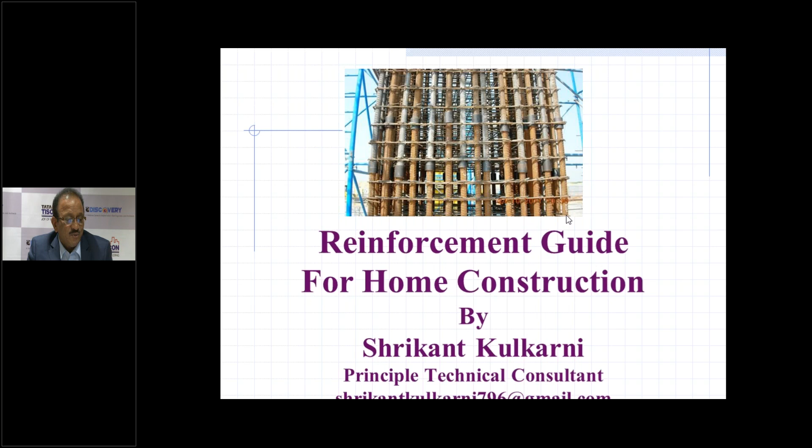So we take up the presentation today. The topic is reinforcement guide for home construction. The presentation outline would be something like this. First we will discuss about the steel industry, then what is this reinforcement, why reinforcement is required, little history about the steel industry, then what are the requirements of steel reinforcement, what are the Indian standard specifications which are required for steel to be used in the construction industry, what IS 456-2000 has to say about the steel.

Then we want to also cover few steel constituents which improve the quality of the steel, or there could be some disadvantages also because of some particular chemicals. We will see that. We will discuss about importance of cover to be provided to the reinforcement, why it is required. We will also cover the impact of corrosion on the construction, and through few interesting slides, we will see what are the practical examples of do's and don'ts when it comes to the reinforcement. And finally, we will conclude, and then after that we will be taking the question answer sessions.

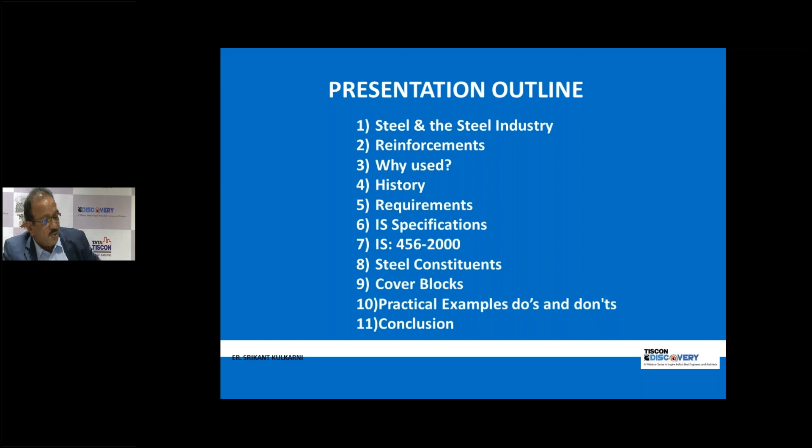So we first understand what is reinforcing steel. Reinforcing steel is an alloy of iron and carbon basically, and it is the most important ferrous metal in building construction. This iron is relatively abundant in the earth crust. It is only next to the aluminium.

And iron undergoes a change of crystal structure at red heat, which assists in many production processes and leads to metallurgical advantages. For example, in cement industry, we manufacture clinker. So iron ore is one of the raw materials which is used, which provides a very good flux, and because of that the clinkerization process highly improves. It assists. It's like a catalyst in the cement manufacturing process.

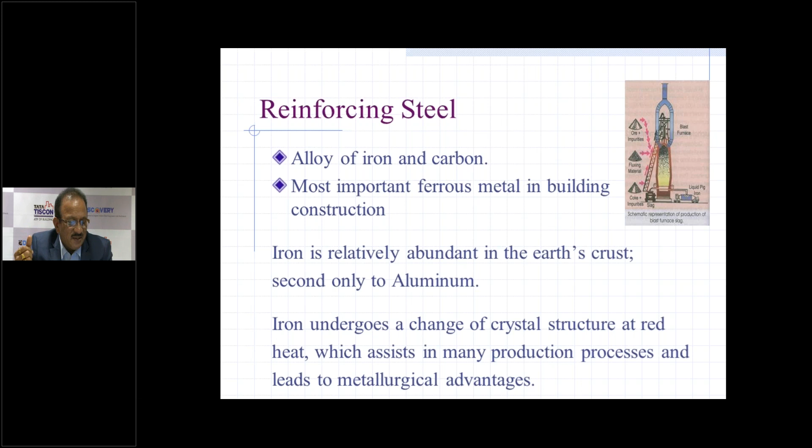We will see how steel industry has grown in India first. In 1947, when India got independence, the manufacturing capacity on pan-India basis was only 1 million ton per annum. And if you talk about recent development, during 2014 to 16, India was third largest producer of sponge iron, and total steel produced in India was around 101 million tons, and we had more than 50 plants in India then.

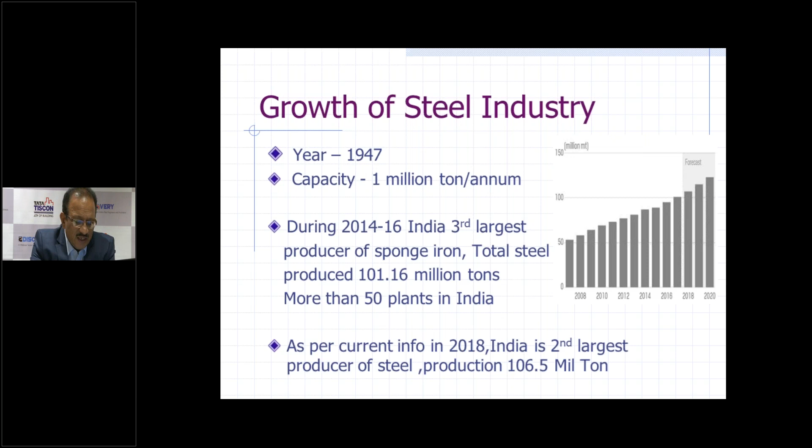And as per the latest current information, in 2018, India is second largest producer of steel, and production figure is 106.5 million ton. This is, I think, interesting statistics we should have at the back of the mind.

Who are the major steel manufacturers in India? Of course, Tata Steel is there, Tiscon is there. They are one of the leading manufacturers. Apart from that, Steel Authority of India Limited is there. Then Bhushan Steel, JSW Steel, Vizag Steel, Essar Steel, Ispat Industries, and so many other small and medium-sized players are there in India. I would not like to cover all of them, but these are a few major players who are playing an important role in the manufacture of steel.

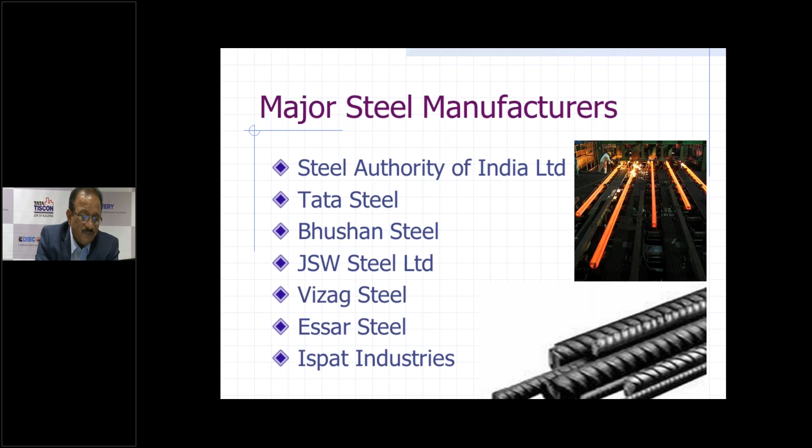What are the requirements for reinforcement steel? Number one, steel should have high yield strength or proof strength. Number two, steel must be ductile enough to permit bending as well as to guard against brittle failure. We cannot accept brittle failure in steel.

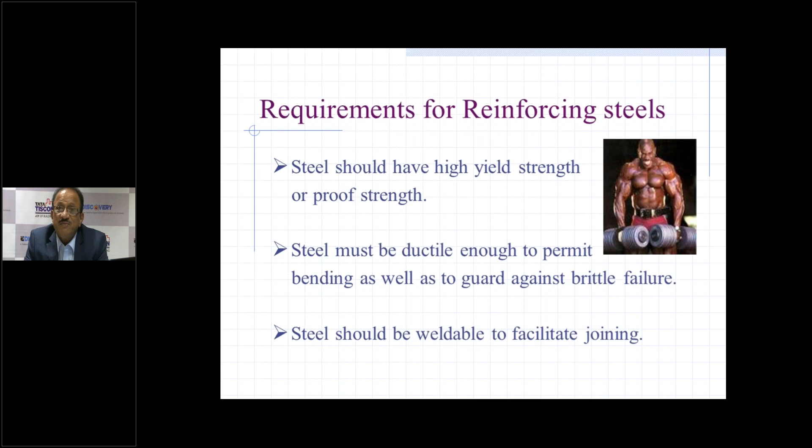It should be ductile, and steel should be weldable to facilitate joining. Many times this reinforcement is to be welded also. Many consultants recommend it in particular situations. Normally we tie the steel with the binding wire, but in many situations welding is also recommended by a few consultants. So steel should be weldable.

What are the IS specifications of steel? Indian standard specification for high strength deformed bars, as per IS 1786, recognizes three strength grades: Fe 415, Fe 500, and Fe 550. These are the three grades recognized by the Indian standard. Fe stands for iron, and the figure following the symbol Fe indicates the specified minimum proof stress or yield stress in newtons per square millimeter.

In the cement industry, we talk about grades of cement. There are three grades: 33 grade, 43 grade, 53 grade. These figures 33, 43, 53 indicate the compressive strength of the cement mortar cube in newtons per square millimeter. On similar lines, here it is the proof stress that is indicated by the figures 415, 500 and 550.

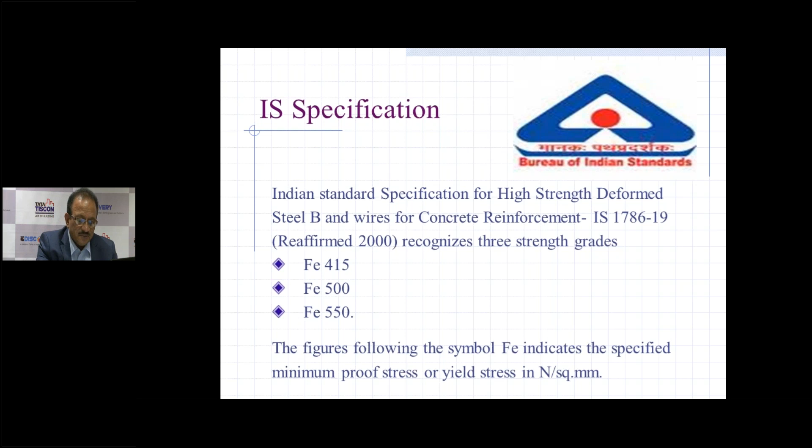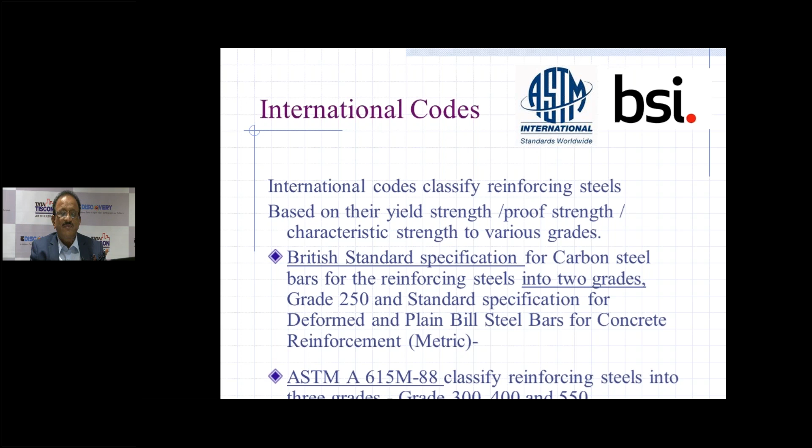What are the requirements as per IS 456-2000? As per IS 456-2000, the reinforcement in concrete shall be any of the following four categories, and any one of the four could be used in construction. Number one is mild steel conforming to IS 432, high strength deformed bars conforming to IS 1786-1985, hard drawn steel wire fabric conforming to IS 1566, and structural steel conforming to grade A of IS 2062. All these four categories can be used for construction.

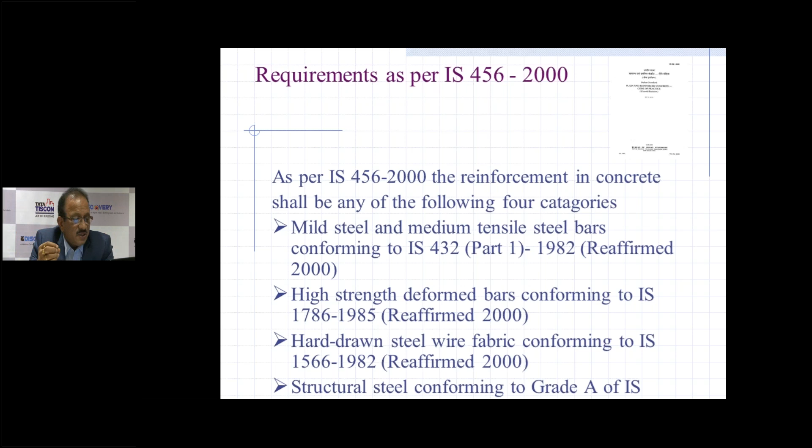Now we will discuss the constituents of steel and their effects. There are more than 10 to 12 constituents in steel, but we have to consider two important properties which these constituents should give to the steel. Number one is strength. Number two, what is more important for the durability of the construction, is corrosion, and the constituents should give protection against corrosion. If these two properties are covered, we have practically done more than 90%.

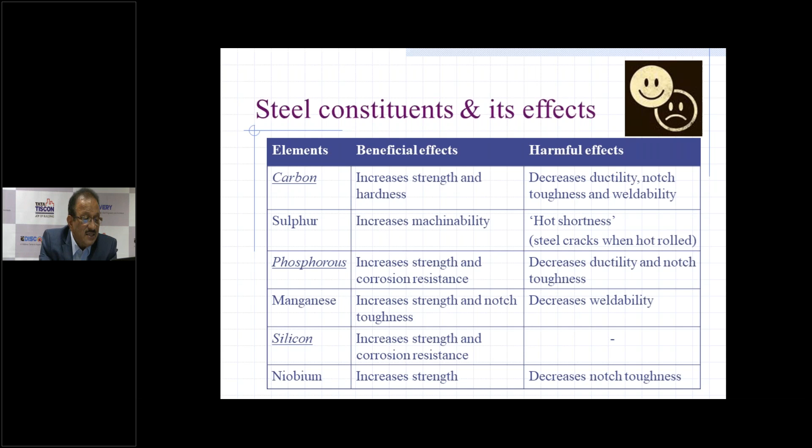Carbon, for example, increases strength and hardness. Phosphorus increases strength and corrosion resistance. Silicon increases strength and corrosion resistance. Vanadium increases corrosion resistance. Chromium increases hardness and corrosion resistance. You must know that stainless steel contains chromium and nickel, and nickel also increases strength, toughness and corrosion resistance. There are many other constituents which we will not touch upon; maybe in the next webinar we can talk on that.

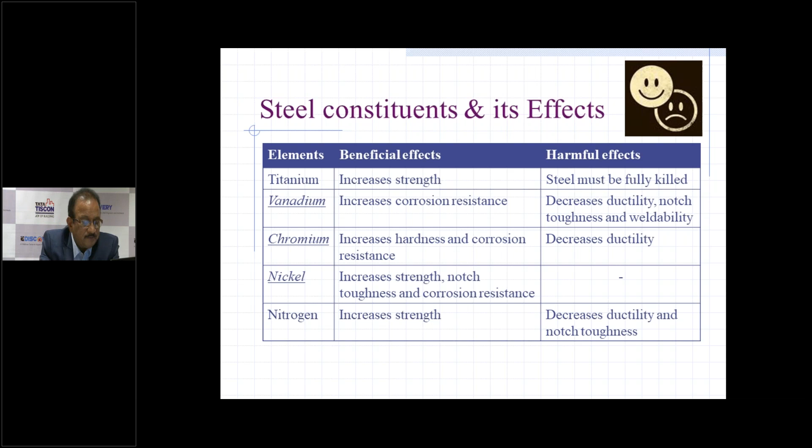Now the question comes, why do we have to use reinforcement in construction? In reinforced concrete construction, RCC is a composite section subject to bending moments. When an RCC member, whether slab or beam, undergoes bending, the top fiber of the concrete undergoes compression and the bottom fiber undergoes tension. Concrete is very good at taking compressive forces, whereas it is very weak in taking tensile stresses.

Steel exhibits the totally opposite character. It is very good in tension, but weak in compression. So when we use both materials together, concrete will resist all the compressive forces and all the tensile forces would be resisted by the steel. This composite section will resist both compressive and tensile forces, and that is why we require steel to take care of the tensile forces created by the bending moment due to loading.

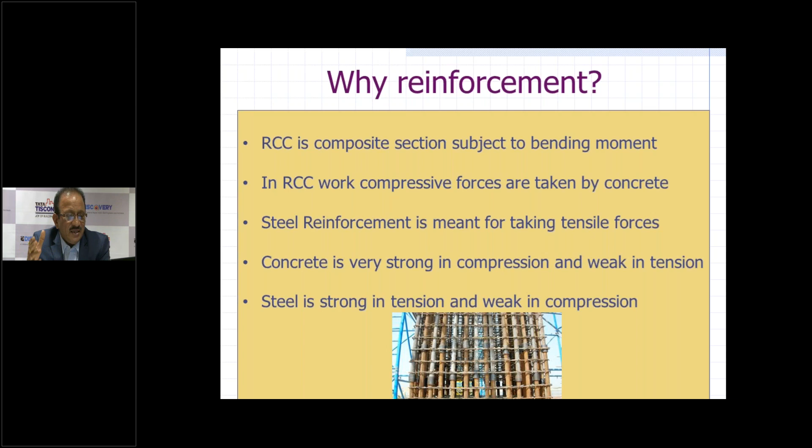So I think that clearly explains why we require steel reinforcement in RCC construction. Placing of reinforcement is very important; it plays a very important role. Steel may be very good in taking tensile forces, but if you don't place it at the right place in the concrete section, the entire exercise would be futile. It would be of no use.

So what kind of precautions should we take? Number one, steel reinforcement should be placed exactly as per the RCC drawings. Structural consultants provide us the RCC drawing, the steel reinforcement placement drawing. So the site engineers have to be extra cautious to see that the steel is placed exactly as per the RCC drawing. Exactly as per RCC drawing means what?

It means the steel required at the bottom of the section for taking tensile forces has to be placed in the bottom only, and the steel that is required for resisting negative moment has to be placed at the top. And what is more important is that the bottom steel should remain at the bottom throughout the concreting process, and the top steel required to resist the negative moment should remain at the top of the section throughout the process till the concreting is completed.

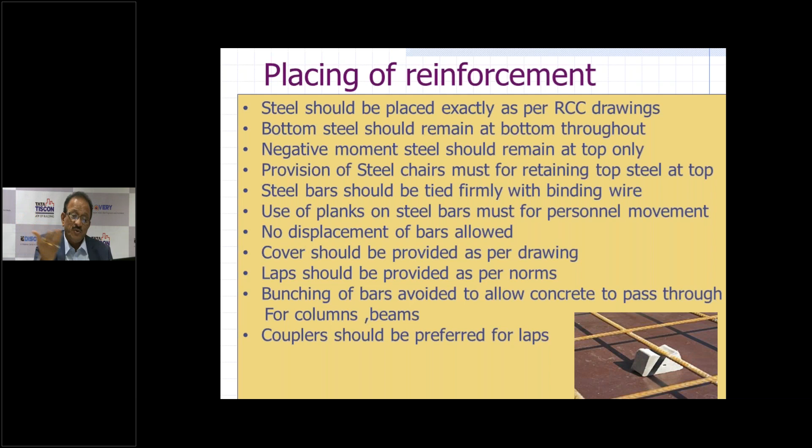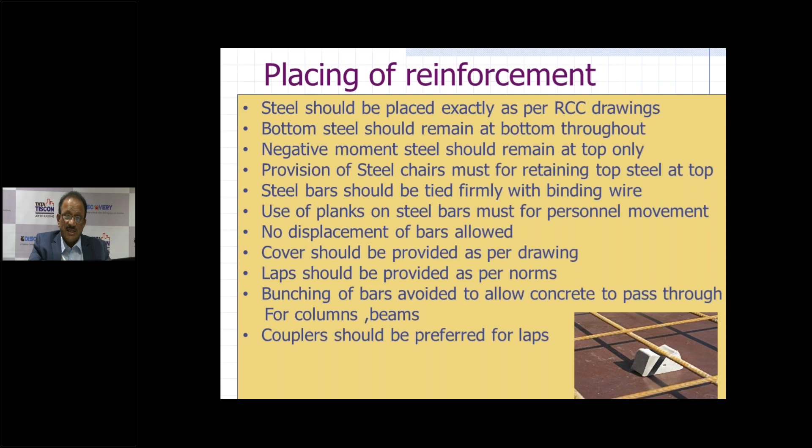And imagine, in a huge project there will be lakhs and lakhs of laps to be provided, and how much steel we are wasting. And if we provide the couplers, we will not only save the steel that is wasted in the laps, but the couplers also allow us to freely place the concrete in the section without any segregation. So that is very important.

Steel reinforcement has to be stored properly. You cannot allow it to be stored in a haphazard manner. Why? Because corrosion is a cancer to the steel. What cancer is to the human being, corrosion is to the steel. So we have to protect the steel from corrosion, and

corrosion will happen when steel comes in contact with oxygen and water. When steel, oxygen and water come together, corrosion will happen. So we have to protect the steel. So we have to store it in a proper shade, wherein we have to protect it from rains, and also we have to see that steel is protected from oil spillage, because the moment steel is coated with oil, it cannot have the proper bond with the concrete, and the load transfer will not happen properly.

So steel which is protected in the shades should be covered with plastic sheets, so that it is not exposed to the humidity from the air. This humidity again will lead to corrosion. It should be stored away from the source of water. The steel should be easily accessible to the site. So you cannot have a steel yard which is some half kilometer away from your site. So it has to be in a nearby vicinity.

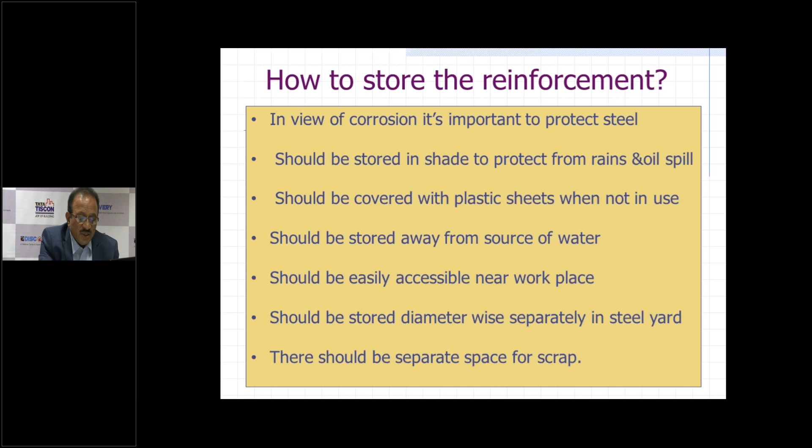Correct? Because when you cut the bars and use them for reinforcing purposes, you are bound to generate some scrap. So the scrap should not be scattered on the site haphazardly. It should be stored properly, and a separate space has to be designated for storing the scrap, so that it can be disposed of conveniently.

And actually these mortar cover blocks are not recommended, because, number one, they are porous. So they provide a kind of gateway for ingress of humidity and moisture inside the RCC structure. So these site-made mortar cover blocks should not be used for providing the cover to the reinforcement.

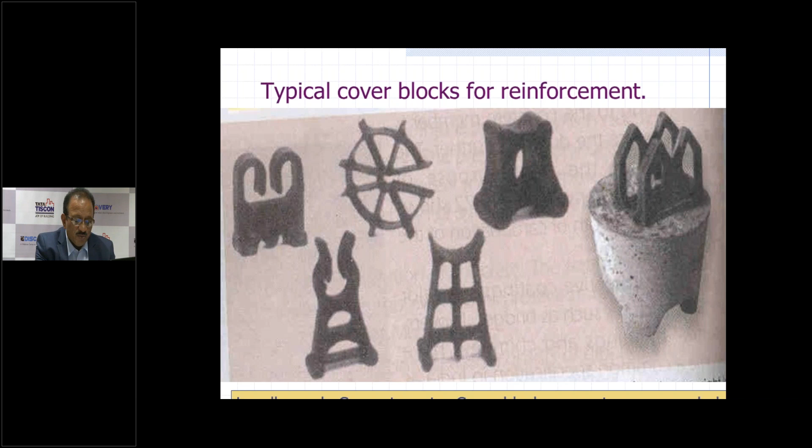What you can see here now is a typical cover block which is recommended. You can see these concrete cover blocks, so neatly finished, smooth, and highly impermeable. These blocks are made with high strength mortar, and these are recommended. You can see this small saddle also, on which the bar rests, and the base is broader as compared to the top, so it gives stability. These cover blocks don't move from the place where they are placed.

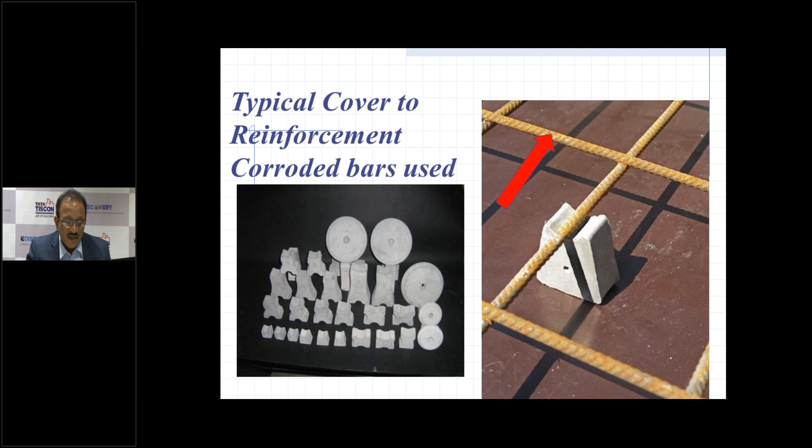But you can also see here the steel bars are corroded. It means this steel reinforcement was not stored properly at site. It has already caught some rust. So this should not happen. In the next slide, you will see the effect of corrosion.

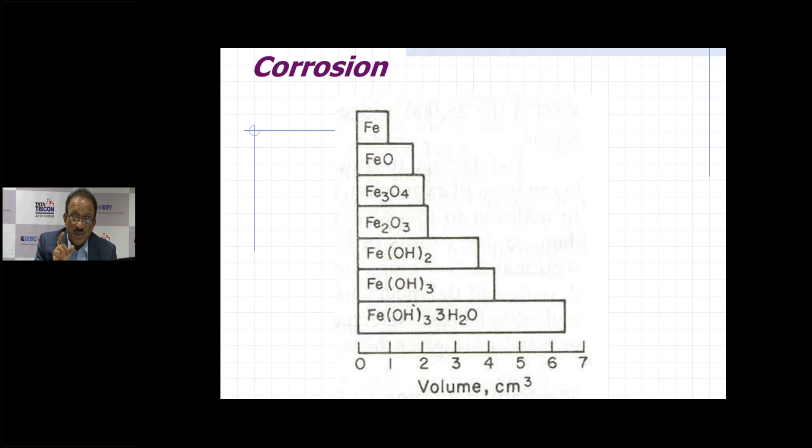Imagine what will happen if the steel bar inside the concrete section starts swelling inside the RCC member, what kind of internal stresses it will generate. And as a result of corrosion, finally the cover which is supposed to protect the steel reinforcement is literally pushed out and steel is totally exposed to the atmosphere. So we have to provide proper quality of cover blocks so that steel is protected from corrosion.

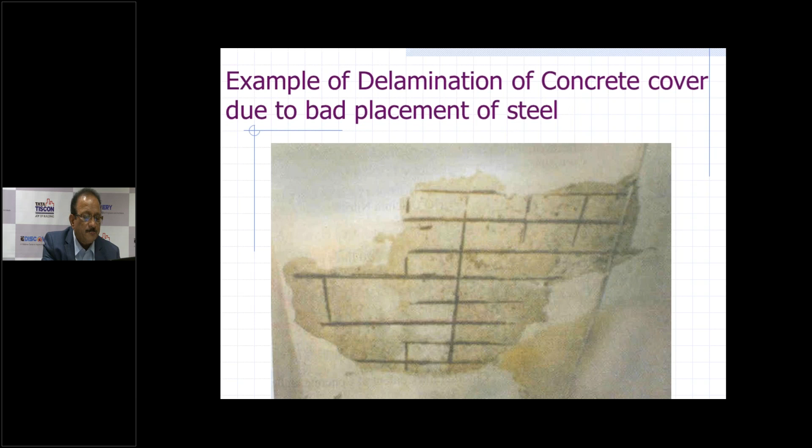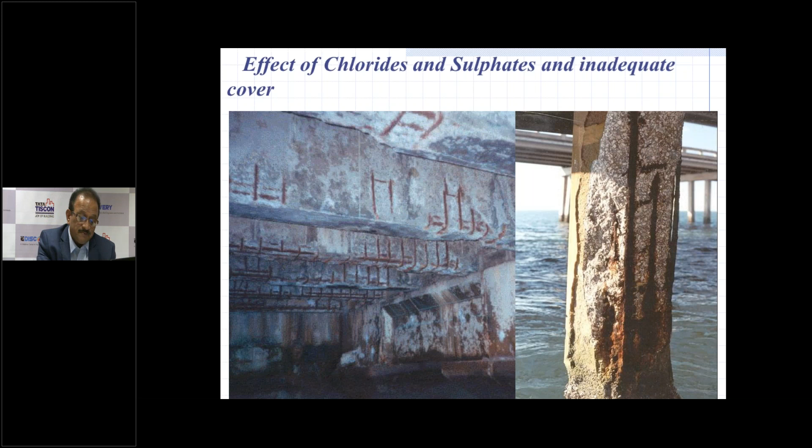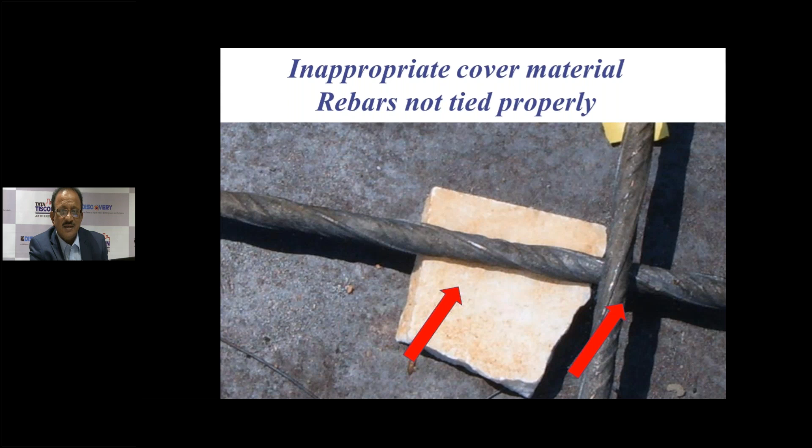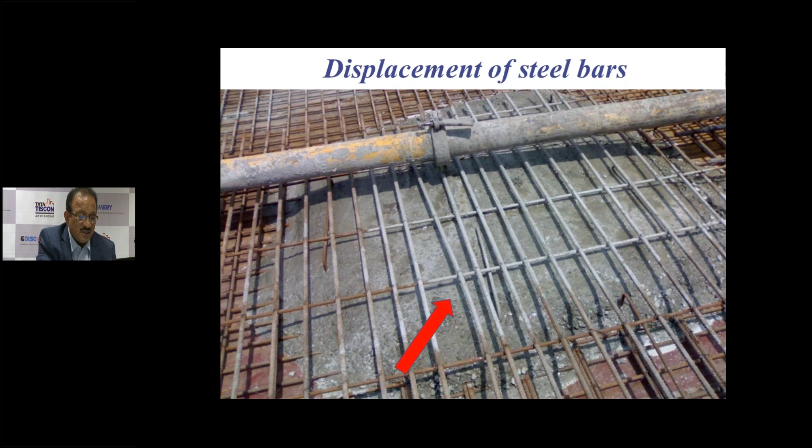Then you can see here there is negative reinforcement provided on this beam portion, and there are no chairs provided. Where this red arrow points, there are no chairs provided, and this top reinforcement, which is supposed to be at top throughout the concreting process, how is it going to remain at top when there are no supporting chairs provided? So I am 100% sure that when the concrete is finished, in this case the top steel, which is supposed to remain just at 15 mm distance from the top of the slab, is going to be pushed inside the concrete, and it will be practically at the neutral axis.

So there will be no steel available at the top to resist the negative moment, and because of that negative bending moment, this entire region, say 1 meter on either side of the beam, will develop a lot of cracks because there is no steel available at the right place. The steel is there, but it has got displaced. That is not allowed.

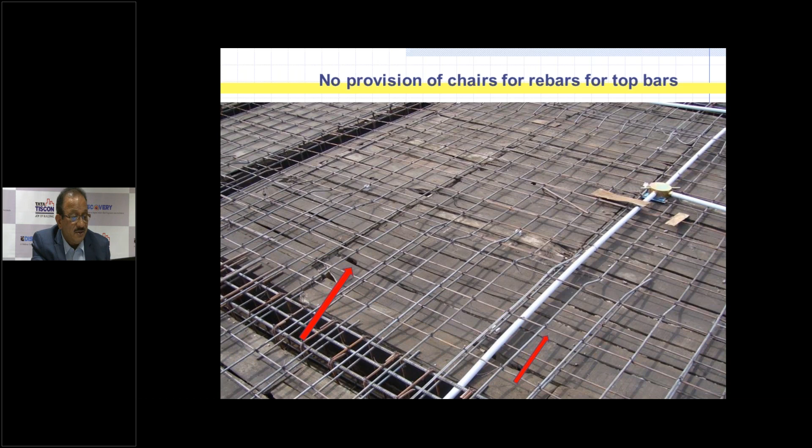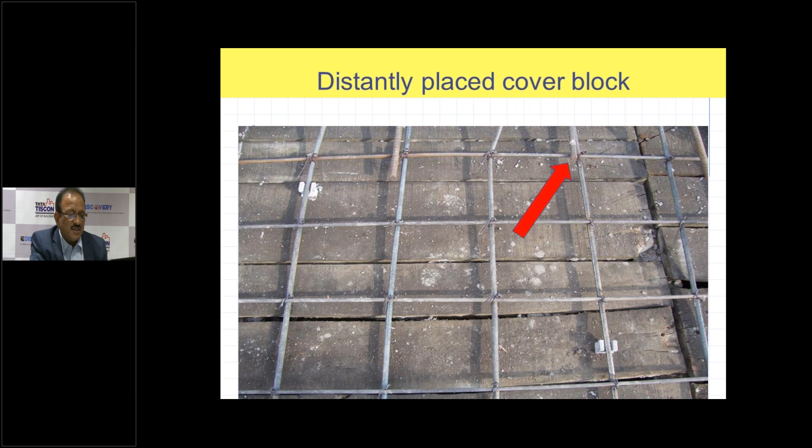Now what we are discussing is some do's and don'ts, and we are seeing some practical slides wherein I have taken these from the site where some bad construction practices have been followed. At some places, some good construction practices have been followed. So I have tried to capture all this together.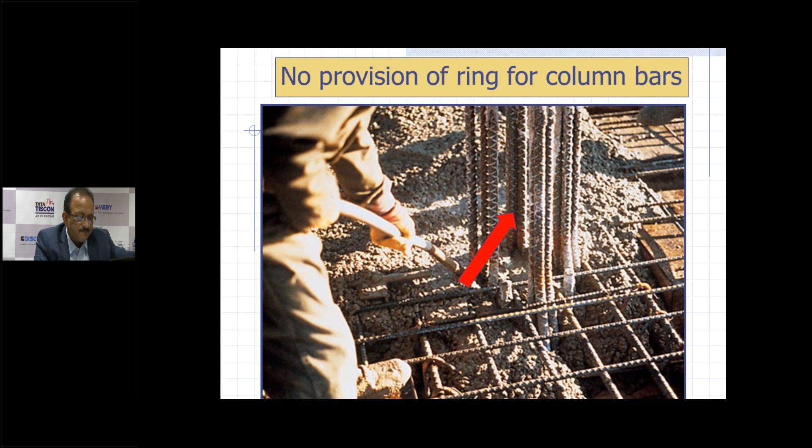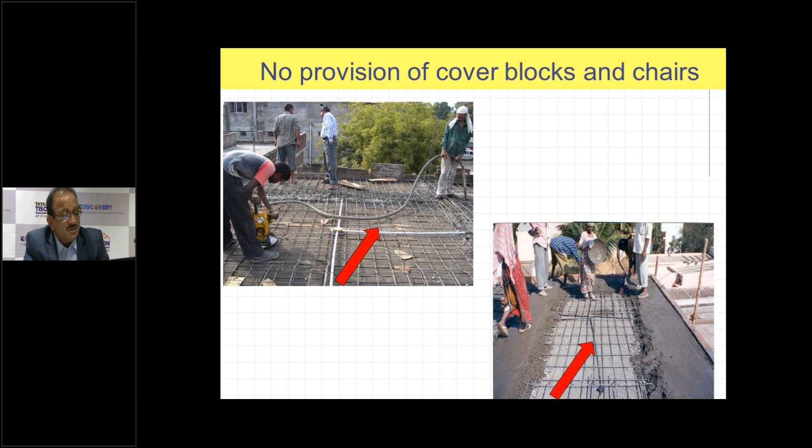Leakages, and the life of the structure is drastically reduced. You can see in both the slides here, there are no cover blocks and no supporting chairs provided for the negative moment bars. Now we again come back to IS 456. There are 5 exposure conditions: mild, moderate, severe, very severe, and extreme. IS 456 recommends minimum nominal cover to the reinforcement as 20 mm for the mild exposure condition and 75 mm for the extreme exposure condition.

This exposure condition is connected to the durability, and IS 456 2000 is heavily banking upon the durability. It has been revised keeping in mind the requirements of durability in different exposure conditions. And this cover plays a very important role, because at the end of the day, if the steel is not protected by giving proper cover, who is going to share the load? Concrete will only take care of the compression, but what about the tensile forces? If steel is going to be there intact inside the structure, then only the composite section is going to work and resist the forces.

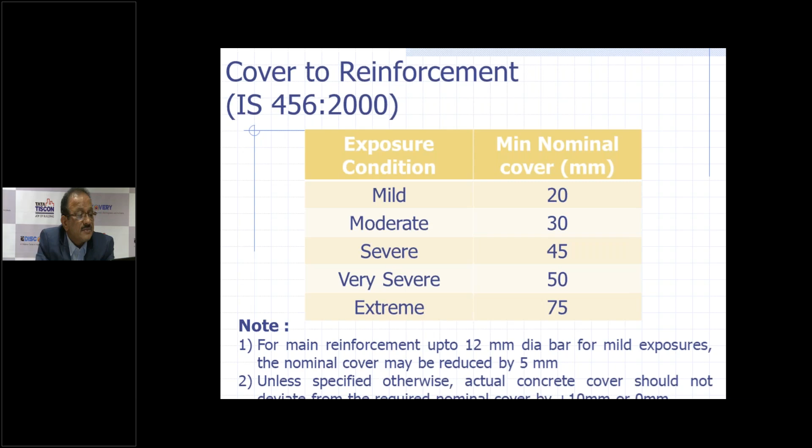The answer is yes. In this situation, it is very much possible that the concrete will get stuck. The normal concrete will get stuck in between only, it may not reach at the bottom. So what is the solution? Solution is perhaps you have to use self-compacting concrete.

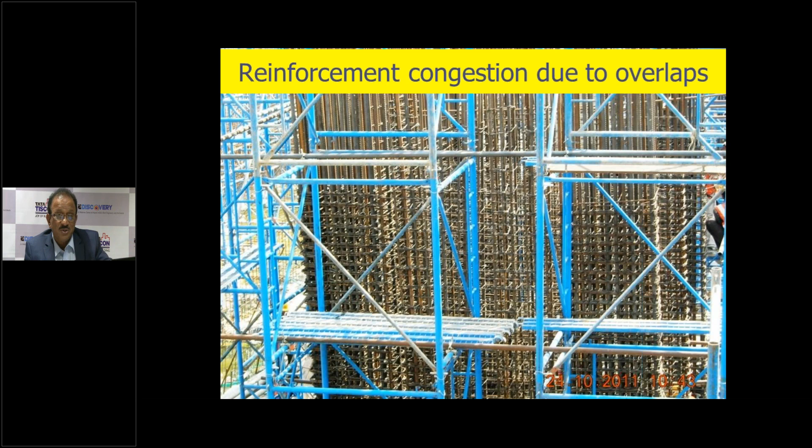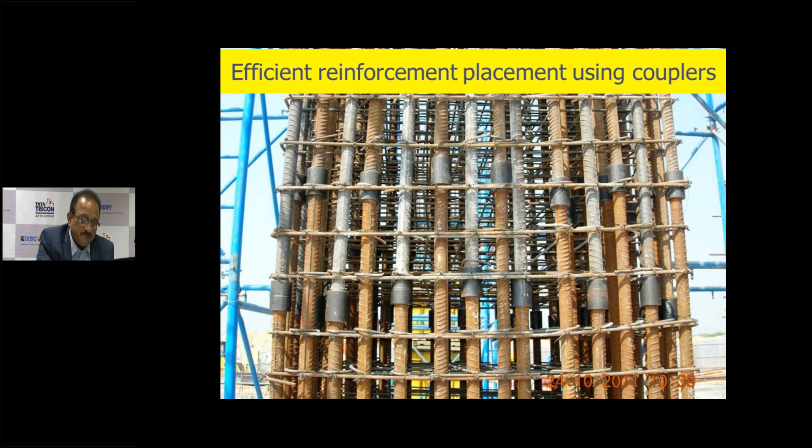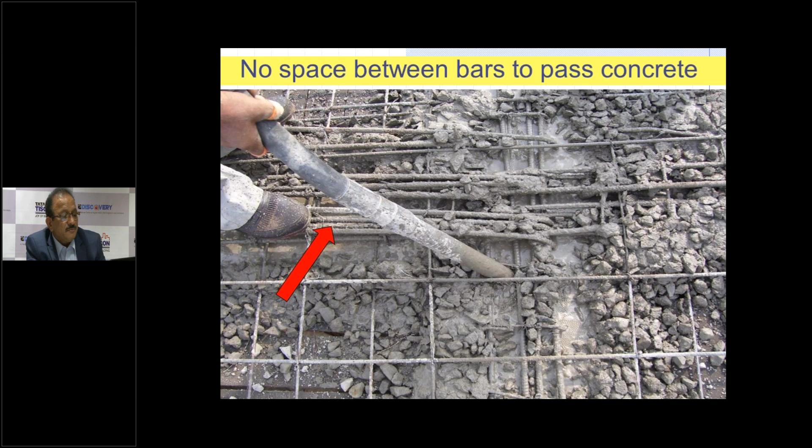When the next floor is going to be constructed, when this column is to be constructed, there is hardly any lap length available for these column bars. So in this case, the load transfer will not happen as per the design, because the lap length - whatever, 40 times diameter, in compression we normally provide - that is the lap length. But I think these are the 20 mm bars, and what you require is roughly 800 mm lap length, and this is not 800 mm. All these bars are less than 600 millimeter. So this is not acceptable. This should not be done.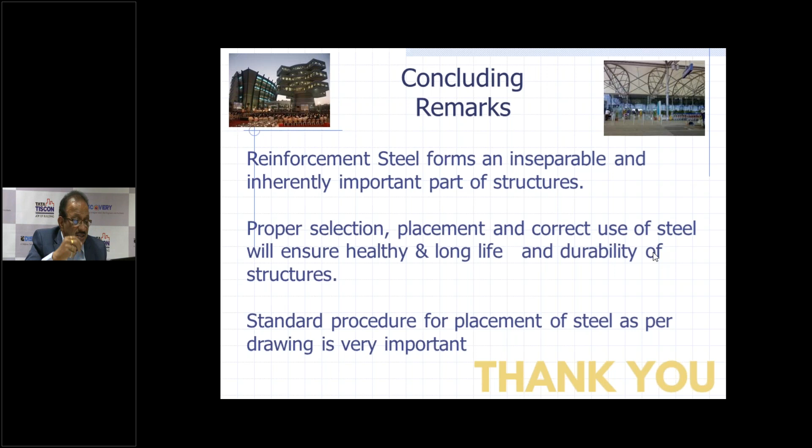Pushkar Patel wants to know, can we weld the bars instead of couplers? No, I will not recommend welding of the bars, because welding reduces the strength, and couplers can guarantee you the efficiency of the joint. In a particular column, if there are some 40-50 bars, welding each bar efficiently, it is very difficult to control the quality and efficiency of the welding. So welding can be a risky solution, but couplers are a 100% foolproof solution. I would recommend that.

Now this is the last question, from Charanpreet Kaur. He wants to know, can we provide additional reinforcement for reducing the bending and shear force? Is there any IS specification for that? See, additional reinforcement is not going to help you, because in the design an under reinforced section is always preferred over an over reinforced section, because in an over reinforced section there is a sudden failure. So we never try to put more steel reinforcement for increasing the efficiency of the structure.

In fact, under reinforced structures are preferred, because you get beforehand warnings by cracks which appear in the structure because of the loading or whatever. So it is always preferred that we should have an under reinforced section.